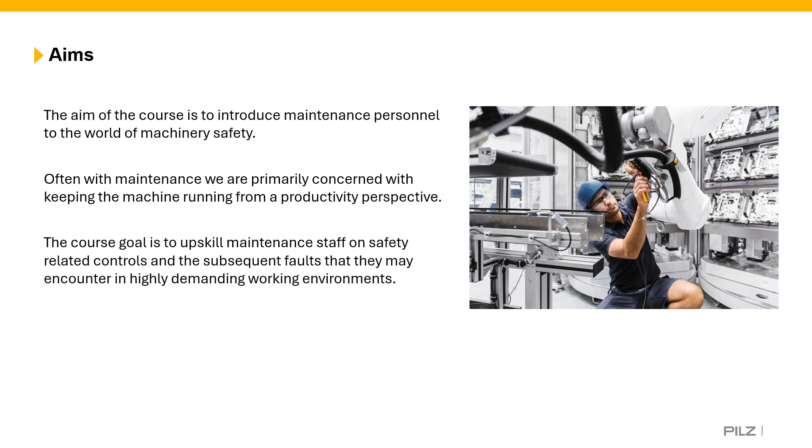So first of all, we need to start with legislation and standards, because we need to understand what is the point of machinery safety. That's often a question that we get asked here at Pilz UK. Well, what's the point of it? Why do we do it? What's the necessity for it? Well, the reason that we do it is because, first of all, it's the law. We are legally bound to make sure that machines are safe and in safe working order for people to use. And this often encompasses maintenance engineers, maintenance technicians, or maintenance staff to make sure that equipment is at a safe level. We're leaving it in a safe state after we've gone in and done our tasks. So this is just a little slide here.

Since Brexit, obviously, we're going in our own direction slightly, but lots of those European laws are still in place in the UK, and we still use European harmonized standards to show a means of compliance. So that's why we keep this in here, and it's just for people to understand the process of how we go from a directive to a UK-based law.

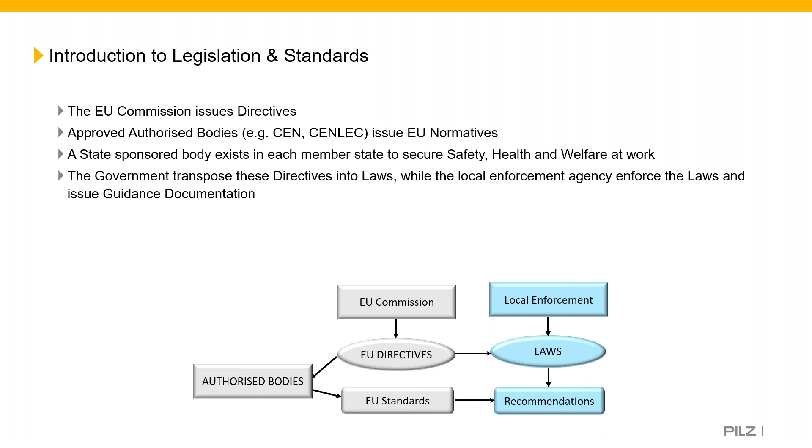Now, within the course, we have a number of slides around risk assessment. And the idea is that we're not trying to get maintenance engineers to do risk assessments. That's not what it is. The idea is that they understand the process of going through a risk assessment as to why we select certain things to protect against hazards, such as guards, interlocks, light curtains, scanners, two-handed controls, all of those types of devices.

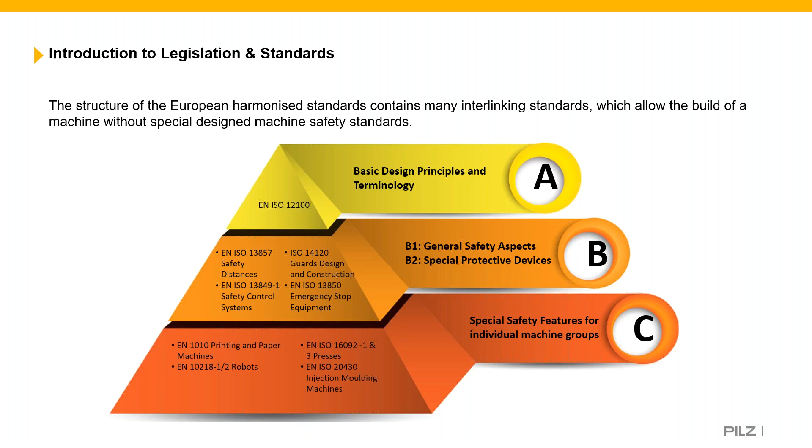Now, the standard itself, we touch on a little bit. Again, this standard predominantly is for those that are managing or advising the maintenance requirements for machinery. But we feel it's necessary to give an explanation of this as well. So what we're looking at here is after a machine is put into service, we're trying to make sure that it remains safe and is reliable and in good repair. Again, this really echoes the requirements that are in PUWER Regulation 5, which talks about maintenance as well.

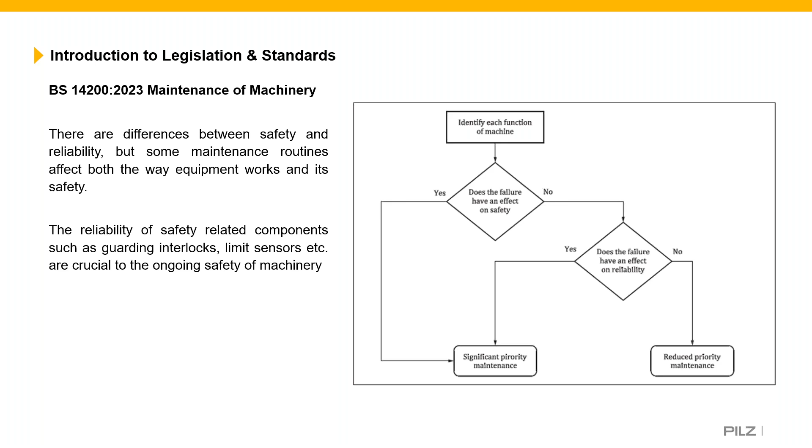Now, speaking of functionally checking, you may do something like pre-startups, and that's something we're going to touch on in a little second. But first of all we need to determine the maintenance approach: is it planned? So are we going to plan it in to do preventative or predictive maintenance, to make sure it doesn't fail in advance? Is it going to be something that's more reactive, i.e. we're walking around the plant and we can hear, say, a bearing squealing. It's still running, but we know potentially that's going to fail. So we're reacting to the physical environment that we're working in there.

We could do things like condition-based monitoring, and there's been some fantastic advancements in that technology over recent years. So again, vibration monitoring, thermography, ultrasonic. I had a guy on a course the other week that was telling me they do ultrasonic checks. So lots and lots of good condition-based monitoring.

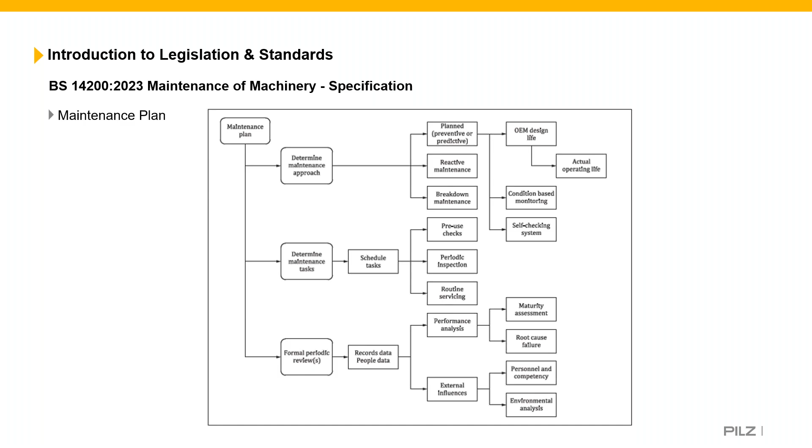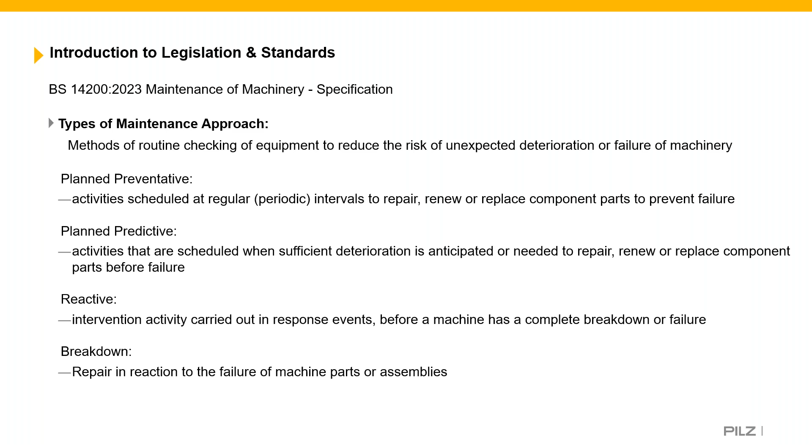Yeah, this slide just kind of gives us an understanding of the different approaches to maintenance and definitions of this. I'm not going to read these out to you guys. You can see them there, but it does look at things like planned preventative, planned predictive, reactive, as we said. So we can respond to the events, as I say, squealing bearings or something along those lines. And then breakdown, which is a reaction to the failure, complete stopping of the line or something along those lines.

Then we've got our different tasks we can carry out here. So as I said, pre-use, daily checks, these can often be done by machine operators or line leaders or team leaders, and from a production perspective, not necessarily always done by maintenance staff, but again, they are maintenance tasks. So it might be done every day, it might be done at every shift, often prior to the machine's operation.

So again, it can just be a visual check. You might just walk around, make sure everything looks okay, make sure we're okay to start up, or we might do functional checks. We might actually open the guard doors and make sure that they reset when we close them. It might be pressing the emergency stops to make sure the system stops. So again, all dependent upon the OEM's designation, really.

Yeah, periodic inspection. In addition to these, as I say, a little bit more deep dive. We might have to dismantle some parts of the machine, identify required repairs, and then report any repairs that we've done. And then our routine servicing, cleaning, adjustments, topping up fluids, all the rest of it.

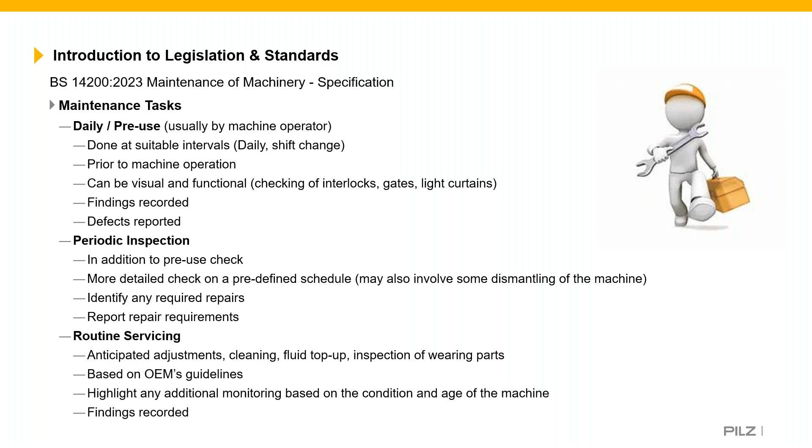As I mentioned, 12100 is a really, really important standard. It's the building block of everything we do in machinery safety, because it's all about risk assessment and risk reduction. Now, I want to be quite clear on this, and I'm sure this has been emphasized in other webinars as well. 12100 does not give us a methodology on risk assessment. It does not say in this scenario use a risk matrix, in that scenario use a hazard rating number or a risk graph or a hybrid of those methods. It doesn't give us a methodology.

What it does do is give us a flow to follow, a process to follow step by step in order to do a risk assessment confidently and correctly. It also gives us some basic terminology as well. So it tells us what is a hazard, what is a risk, what's a danger zone, what's an exposed person, what's an operator. So it does give us some terminology which helps us to interpret the essential requirements that we can find in legislation.

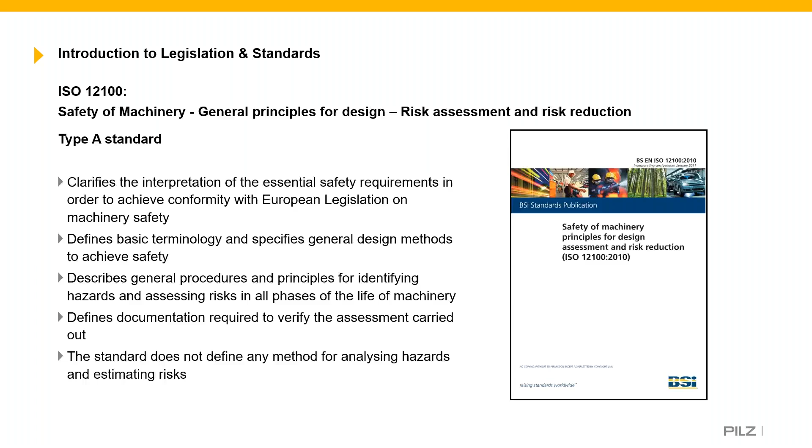So yeah, what is a risk assessment then? It's a series of logical steps that allows us in a systematic way to examine the risks that are associated with machinery. When we do our risk assessment, we then look at risk reduction as described in this standard.

So the purpose of the risk assessment is to identify any hazards, estimate the level of risk. This is where your methodology comes in. So you'll first identify the hazards. Again, we often suggest that risk assessment should be done as a team, so that we've got people from different backgrounds with perhaps different specialized skills in order to understand the risks

that we face. This is often where maintenance staff will be included, because maintenance staff, their job is to find faults and work with electrical and mechanical systems. So you may be included as maintenance staff in identification of the hazards and perhaps the estimation of the risk. And as I say, the estimation of the risk is where we use our methodology.

We then need to evaluate that score, that color, that number that we've given to that hazard. So evaluation is a very important part. Is it acceptable? Now, every business, every industry has a different level of acceptable risk. And again, that's not for us to dictate that to you. That's for you as a business to set your stall out there.

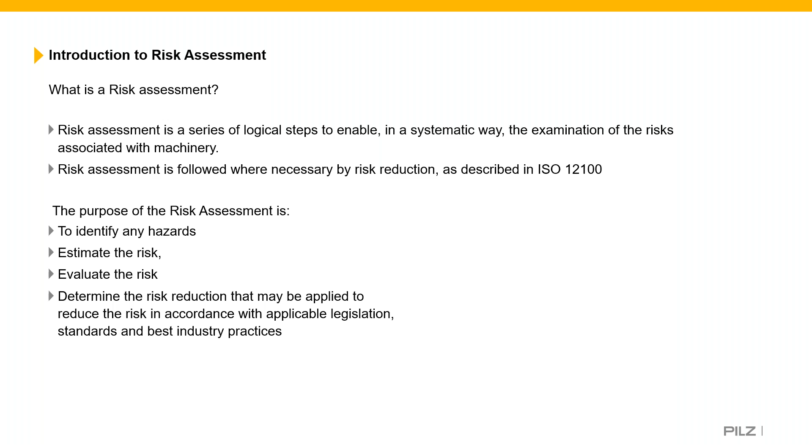Now, again, you may be thinking, well, why are we talking about risk assessment? We're end users. This is mainly aimed at OEMs. We don't really have to consider this. Well, actually, we do. Because yes, you are right. In the Machinery Directive, which is the current law that we have in Europe, which is transposed in the UK as the Supply of Machinery Safety Regulations, it states that manufacturers of machinery or their authorised representatives must ensure a risk assessment is carried out.

We also have the Use of Work Equipment Directive in Europe, which in the UK we transpose as PUWER, the Provision and Use of Work Equipment Regulations. And again, in here, the emphasis is on the employer to make sure that a risk assessment is carried out in order to make sure that the equipment is safe for use for their employees. So in some respects, we might think that risk assessment only applies to OEMs, but actually it doesn't. It applies to both sides of the machinery safety fence, machine builders and end users.

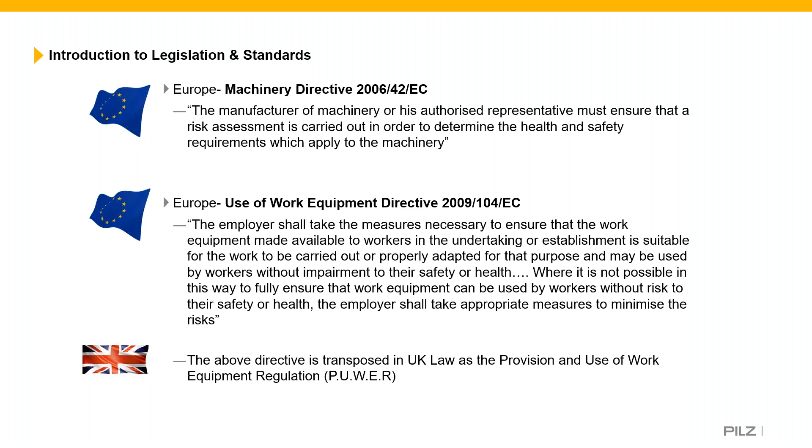Now, we mentioned the risk reduction part of risk assessment. And particularly in step 2, I was talking about things like light curtains, interlocks, scanners, pressure mats, two-handed controls, all of these types of devices. Now, those devices require a control system. And where it requires a control system, we have to look at our safety-related control standards. Now, as I previously mentioned, there are 2. There's 13849 Part 1 and there's 62061.

We focus predominantly on 13849. Out of the 2 standards, in my experience, 13849 is a little easier for people to get their heads around, okay? And commonly they'll be familiar with things like performance levels. They may have heard that phrase performance level before. So in the course, we don't spend all day learning about MTTFd and diagnostic coverage and all of the categories and the intricacies of all of that, but we do touch on it because we need to understand why. Why is this dual channel?

What is the purpose of dual channel? What is the difference between a category 4 system and a category 2 system? We need to know that because when we're fault finding, we might do something where perhaps we make a mistake and we've now changed the category and it's not detecting the short circuits that we previously thought it was. So again, having an awareness of this, we believe is very beneficial for maintenance staff.

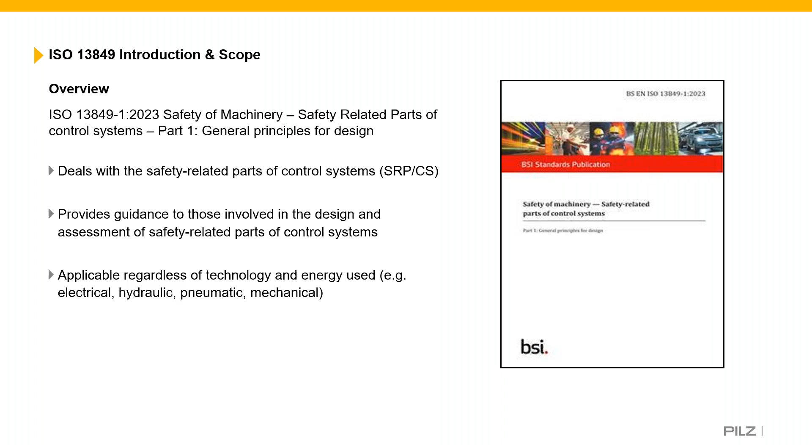And we explain the categories. It's about, I suppose, like a jigsaw piece. To get to the performance levels, we need to look at the categories, we need to look at diagnostic coverage, and we need to look at the reliability of the components, which is the mean time to dangerous failure.

And to be honest, that's kind of the depths of what we get into. We do go through the categories in a practical example when we do the course. And the reason we do this is because the delegates will wire up to certain categories. Okay, so we do get the delegates to wire a category 2 system, a category 3 system, and a category 4 system.

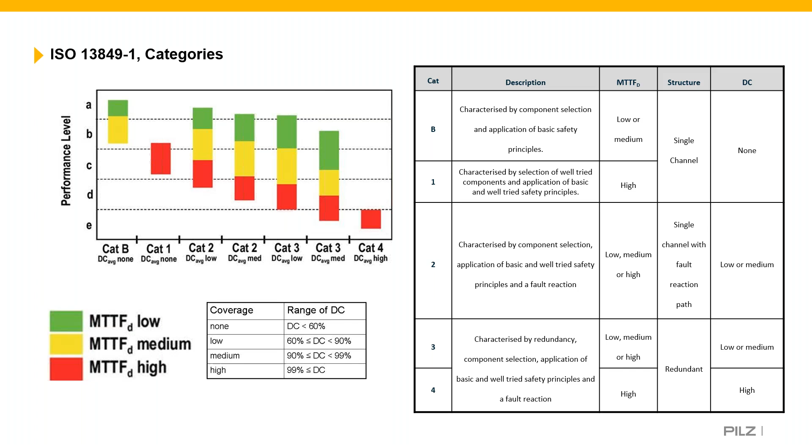We also talk about this standard, 60204, which is the safety of machinery, electrical equipment of machines standard. Now, 60204 is a standard that's used throughout machinery safety. Almost all equipment has some form of electrical or electronic devices on them. So the idea of the standard is it looks at the safety of persons and property, consistency of control, and again, ease of operation and maintenance. So it does make reference to maintenance.

Now, in my experience, having worked in industry for a number of years, a lot of people don't know about 60204 when they're maintaining equipment. Often they will refer to, in the UK, what we call 18th edition, or BS 7671. Now, BS 7671 is a standard and it's a very good qualification to have 18th edition, but that's predominantly aimed at electrical installations, whereas 60204 is about electrical safety of machinery, specific to machines, okay?

So in here, it gives us things like wire colors. It tells us about excepted circuits, things that remain live after isolation. It talks about direct and indirect contact and how we protect against that. It talks about SELV and PELV, and it's a huge standard, really important standard if you are from a maintenance background. So yeah, it does look at equipment that has a voltage range of 0 to 1000 volts AC and 0 to 1500 volts DC, okay?

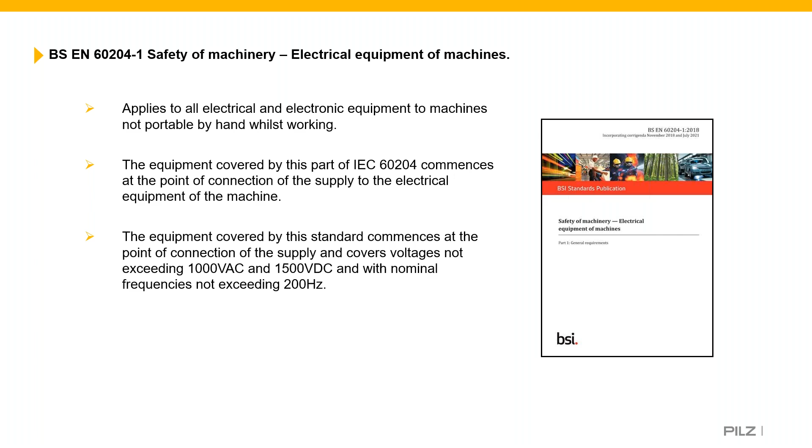So we then get into a little bit of the practical wiring. And this is, to be honest, the bit that the delegates really enjoy. Because, yes, as I said, it's very important to understand the legislation and the standards that assist us. But as maintenance staff, we want to wire things up. We want to make things work, make things come in and out, get some lights flashing and all the rest of it. So, yeah, in the few courses we've run already, this is the bit that people really like.

So what we do is we guide the delegates through how to wire up certain categories. Now, they will work to a schematic diagram, okay? But we also go through the process of explaining the different parts of the operation manual, such as the mode selector setting. So, are we with detection of shorts or without?

And again, as you can see here, to wire up a safety relay, you have to understand what with detection of shorts and without detection of shorts actually means. So that's where the emphasis of understanding 13849 comes from, okay?

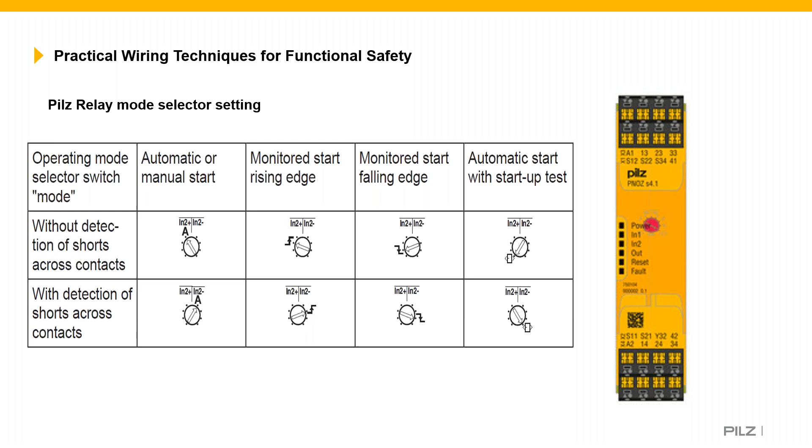Now, within the course, we look at a number of different starting or restarting settings. So the category 2 and category 3 system will be automatic, monitored start with falling edge, and the category 4 system will be an automatic start, okay? We do also show the functionality of an automatic start with the startup test just after the guys have wired it up. So again, it's just to show the capabilities of the safety relay.

We then explain what this actually means when you look in the operations manual for your devices. So as you can see on the left-hand side, it shows you your input circuitry. So what are you trying to wire? Is it an e-stop? Is it an e-stop that's single channel or dual channel? You know, is it without detection of shorts? Is it with detection of shorts? Is it a safety gate?

Is it an OSSD device, such as a light beam or perhaps an RFID switch, which is actually part of the course? You do wire an OSSD device as a category 4 system. So again, we go through the explanation of what is actually in the manuals and how that relates to the devices that you will have on your machinery.

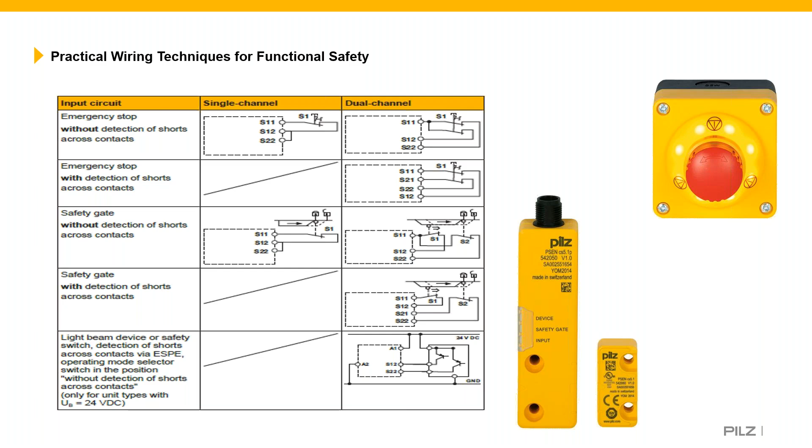We also look at the output system. So we look at with or without feedback loop monitoring. And again, the emphasis here is from 13849. Do we have to check the feedback loop? Well, for most machines, yes, we probably will. Okay, but maybe we don't. It all depends on what has been selected. Okay, and again, this relates to the automatic start or the monitored manual start, which is essentially with a reset button. Okay.

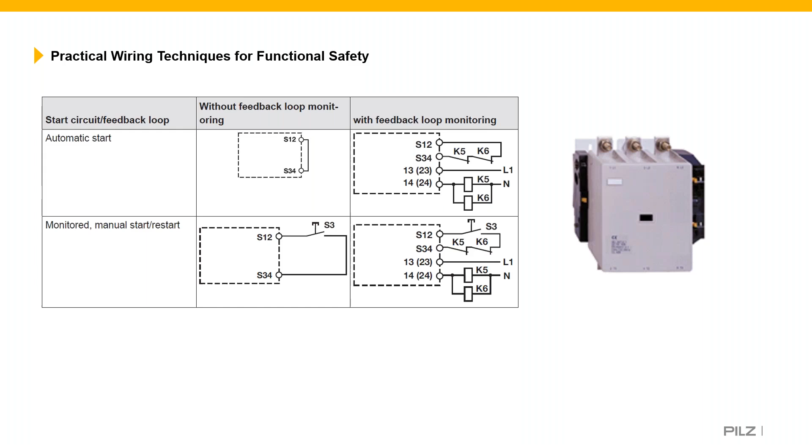So yeah, in terms of fault finding, again, we go through with the delegates what's in the manual. So yeah, believe it or not, we actually do indicate how faults happen. So if certain things are flashing at you, that means we have to look at something. So for example, if IN1 flashes and IN2 stays solid, then we need to look at the fault which is on IN2. Yeah, so the light that flashes at you is just indicating I'm healthy, but the other one isn't, for example.

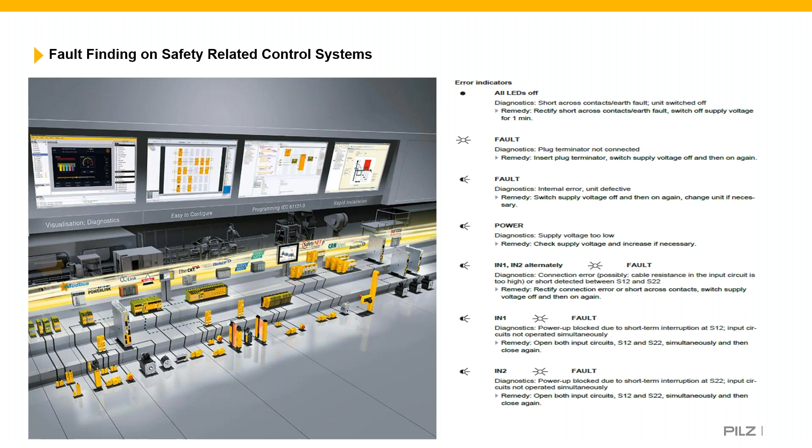Now, this next slide is quite interesting. I'm going to be honest, in the few courses that we've run already, this is how most people are wiring up the controllers, okay? This is what we're seeing on most bases, but what we're showing you here is the boards that the guys will work to. So a couple of control contactors, and then we've got a contactor that drives a fan. We've got 3 safety relays, and we've got 3 safety functions.

So one safety function is an emergency stop system. The other safety function is a mechanical locking device, a guard switch. And then the third safety function is an RFID switch, okay? So the delegates will work to a schematic, okay? Now, they don't have to draw anything out. They don't have to do it themselves. The schematic is there just for them to follow.

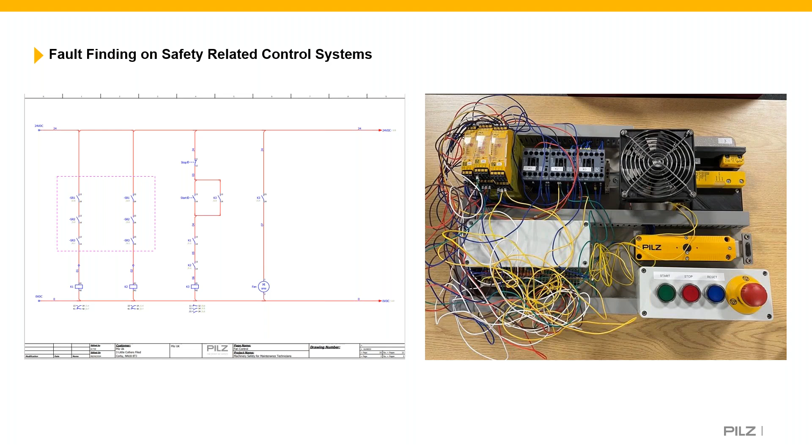But yeah, essentially, guys, the idea behind the course is to upskill maintenance engineers, to make engineers more aware of safety related controls and machinery safety.